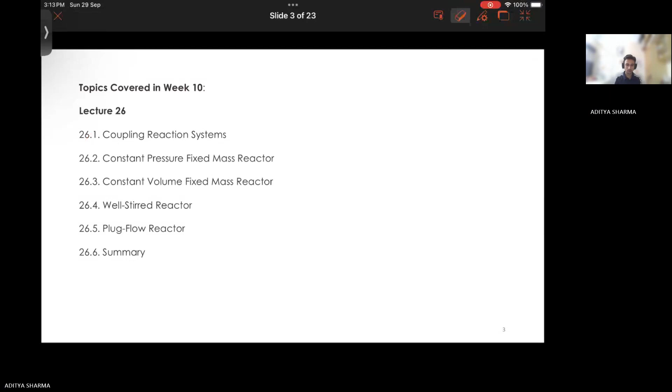So first topic is... so this is your coupling reaction systems. So what do we mean by coupling here?

As I have already told, we did discussion on chemical kinetics, right? And then when we are trying to understand a system, we try to do it using the basic conservation laws. The conservation of mass comes into picture, and then conservation of energy comes into picture. And if your velocity is also involved, momentum is also involved.

So now we have these conservation equations, and then we have our rate processes - the rates at which the different reactions or different steps are taking place. So what we do is we couple these two approaches: your conservation and your chemical kinetics. They go hand in hand, and this way we analyze our particular reaction. So this is the meaning of coupling here, coupling reaction systems.

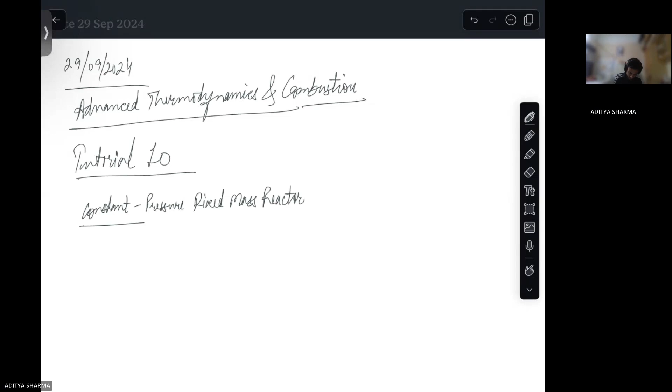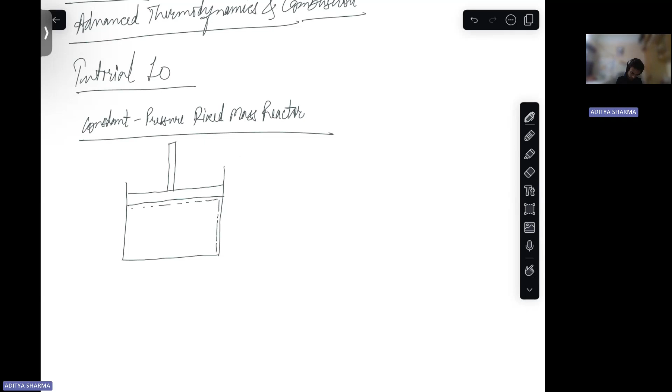So first is your constant pressure fixed mass reactor. One good example of a constant pressure fixed mass reactor is your piston cylinder, if the combustion is taking place in a piston cylinder. So this is the boundary of your system.

So this is your constant pressure fixed mass reactor. I'll draw these four reactors, and that will be helpful in discussing this. This is your second, then is your third, so this is your well stirred reactor. Then fourth is your plug flow reactor.

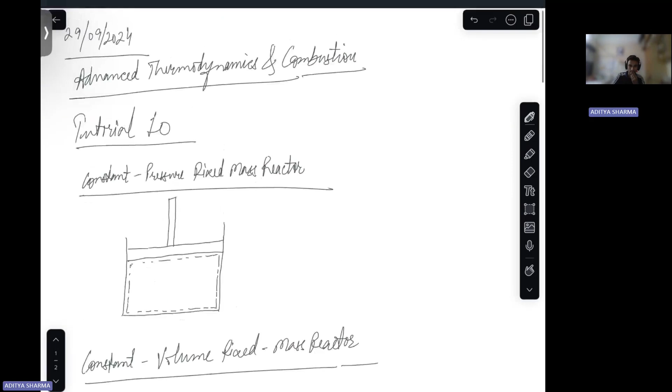So these four types of reactors have been discussed in this lecture. Let's see what the first reactor says. So this is a constant pressure fixed mass reactor - pressure here will remain constant, and the mass in your system which you are studying will remain constant.

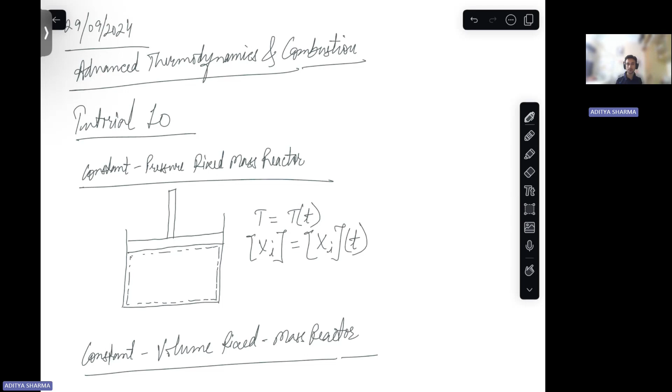So how do we analyze the system? We analyze the system by means of first, temperature data - with respect to time, how the temperature changes. Then we analyze it using the concentration data - the concentration of different species with respect to time. Then is your volume data - the change in your volume with respect to time.

Based on your conservation equations and your rate equations that we derived in chemical kinetics, we try to get the equations for these. This way we get information on how your temperature evolves in the reaction with time, how your species evolve in terms of their concentration, and also how your volume evolves. So this way we analyze such a system from the thermodynamics perspective, comprehensively.

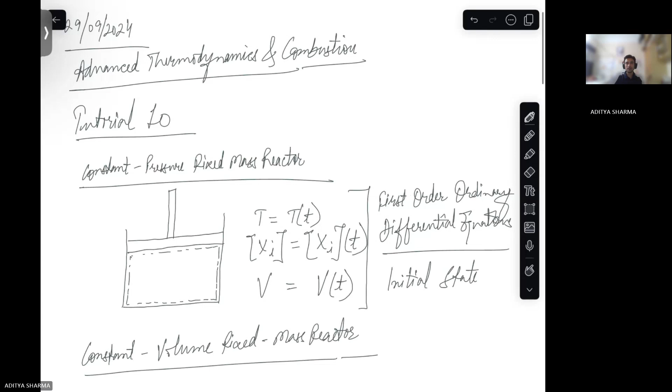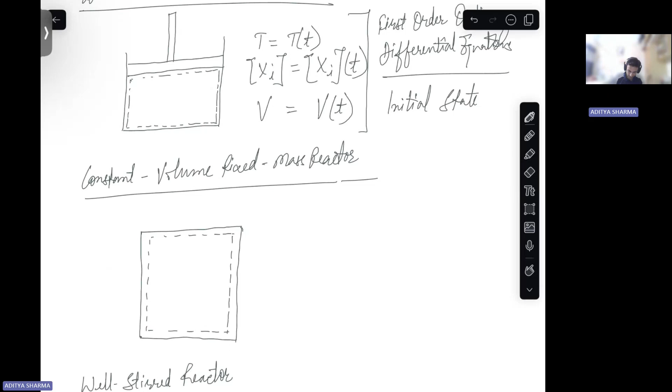Then is your constant volume fixed mass reactor. Here also some things are common if we compare it with the previous reactor. So we are concerned with the temperature that is changing with respect to time, then we are concerned with the concentration data of different species involved in the reaction that are changing with respect to time. But also here we are concerned with the pressure, because in such reactors there is change in pressure also.

So this way we try to analyze our such system in which combustion is taking place. So the pressure equation, then the concentration equation, and then the temperature equations all have been given in your lecture slides.

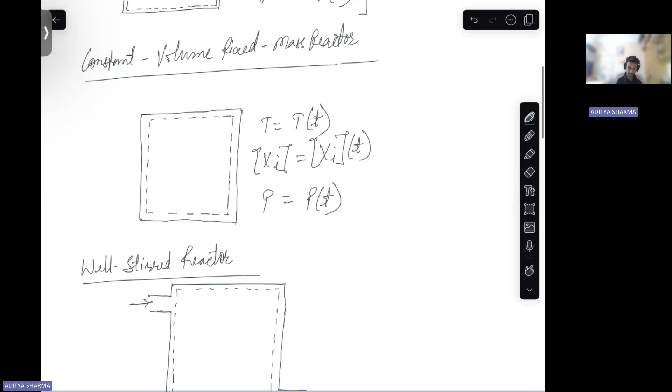Moving on to the next reactor type, that is the well stirred reactor. It's a type of reactor in which you have some flow into your control volume or the system that we are concerned with. So that system we define in terms of some control volume, like this is your control volume, where we have this is inlet and this is outlet.

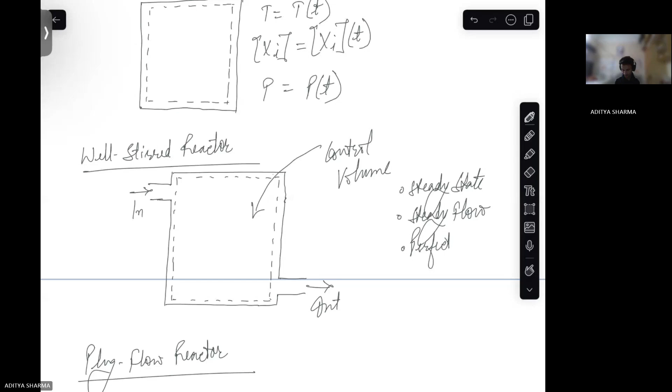First, we assume that the system will remain in steady state. Then we take the flow to be steady. Second, we also assume that the reactants are perfectly mixed, or the species involved are perfectly mixed. So this is your well stirred reactor.

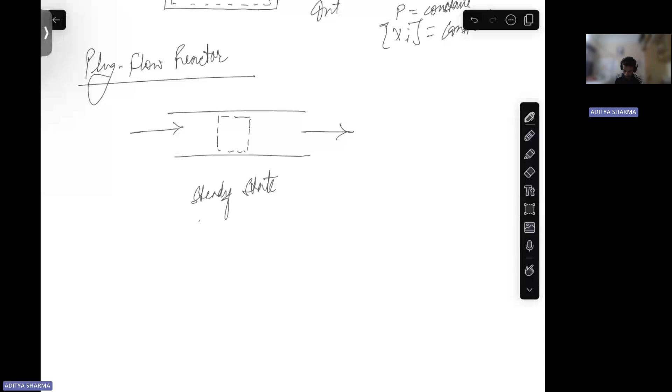Then there is no mixing in the axial direction. So no axial mixing takes place in these types of reactors. Also, we assume that the flow is frictionless in this case.

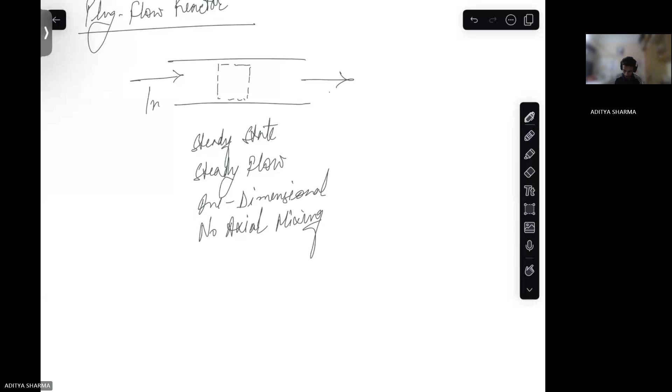So the process remains the same. We get a set of ordinary differential equations and the condition of initial state of the system, the initial values of the different parameters involved in a system when the system is in its initial state, and then we solve such combustion problem. So this is your plug flow reactor, this is your inlet and this is your outlet.

So these four types of reactors have been discussed in lecture 26. Then next is lecture number 27. So all these we have discussed, and now we will move on to lecture number 27.

So here the discussion is on the conservation, before and after, conservation of your different parameters or properties before and after the reaction. Not just before and after the reaction, but also when the reaction is taking place, these properties must remain conserved, right? So how these things come out in a chemical reaction during combustion — this is the focus of discussion in this lecture.

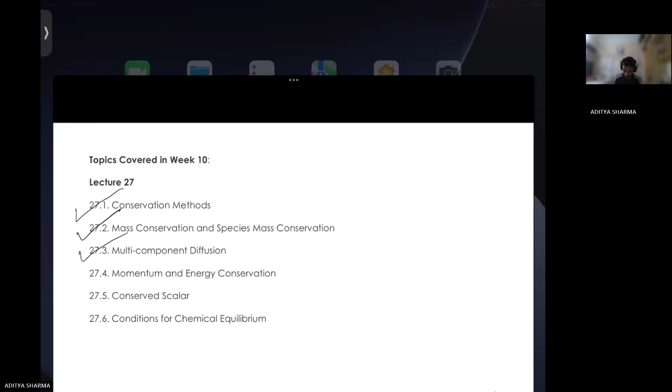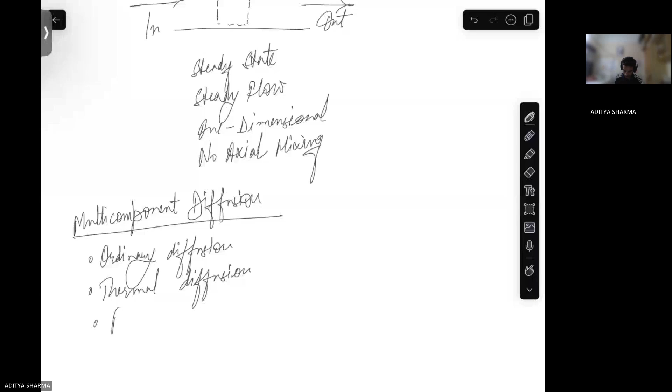One is your ordinary diffusion, then is your thermal diffusion, then is your pressure diffusion, then is your force diffusion. Ordinary diffusion is the one where the difference in the concentration of different species leads to diffusion - concentration gradient basically. Thermal diffusion comes from the difference in temperatures of different species. Same way, pressure diffusion comes from the pressure gradients, and forced diffusion is from the difference in the body forces of different species. So these are the four types of diffusion that have been discussed in this topic.

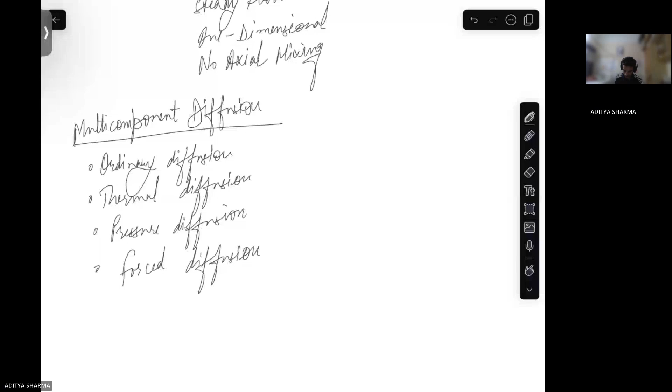So this is multi-component diffusion. All these factors we are taking into consideration here while doing our thermodynamic analysis of a reactive system. Same way, your momentum and energy conservation - how we do it - has been discussed here.

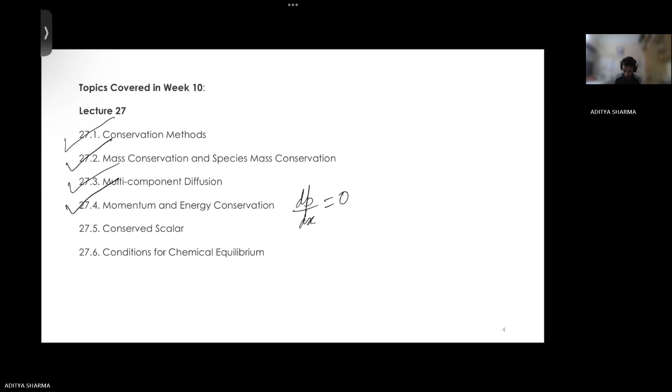After that is conserved scalar. Conserved scalar, as the name suggests, is a scalar property which is conserved for the whole flow field.

One such example of a conserved scalar is your mixture fraction. There are other properties also that can be conserved as scalar properties as far as combustion discussion is concerned, and these remain conserved. Mixture fraction basically is the mass of material originating in the fuel stream to the whole mass of the mixture. So this is the discussion on conserved scalar.

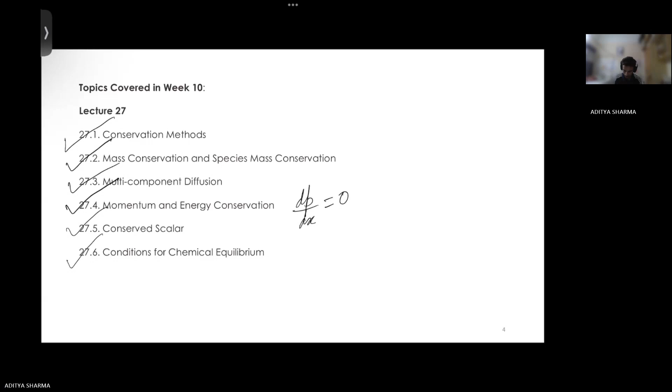So now we will move on to questions. First we will see conceptual questions, after that we will see numerical questions.

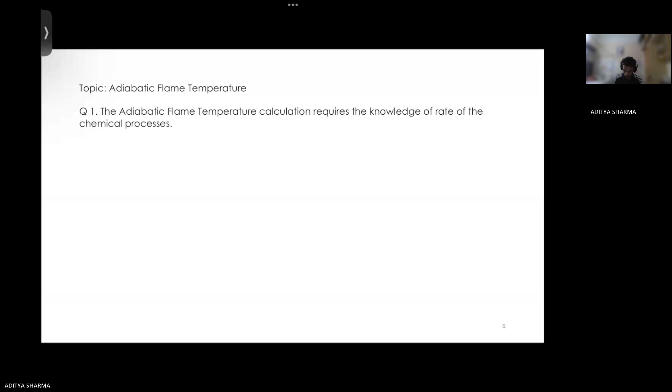First question is on your adiabatic flame temperature topic. Because though this topic has been introduced in week 8, the whole discussion is connected. Please read this question and try to answer this.

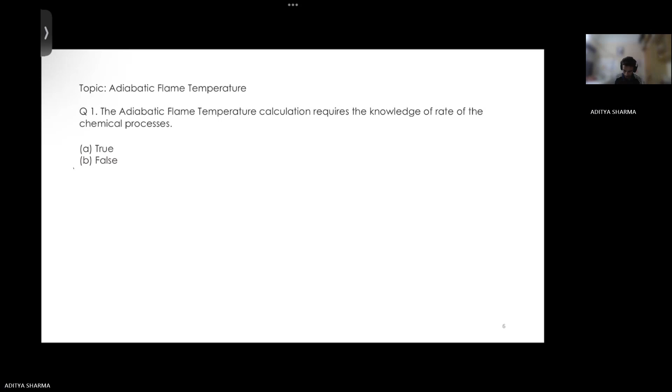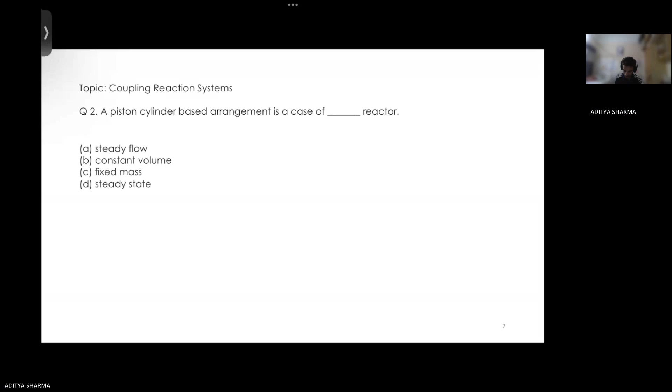So we have briefly seen the type of reactor that encompasses the piston cylinder. And that reactor is - so even if we see a piston, one thing we know is that there is no steady flow here.

So this is not your answer. Then if you see constant volume, that is also not true because the piston will move. In that case, volume will change. Next is your fixed mass and then steady state.

In such type of reactors, your temperature with respect to time and your concentration of species involved with respect to time will change. So in that case, it cannot be a steady state reactor. But the mass inside this reactor remains fixed, correct?

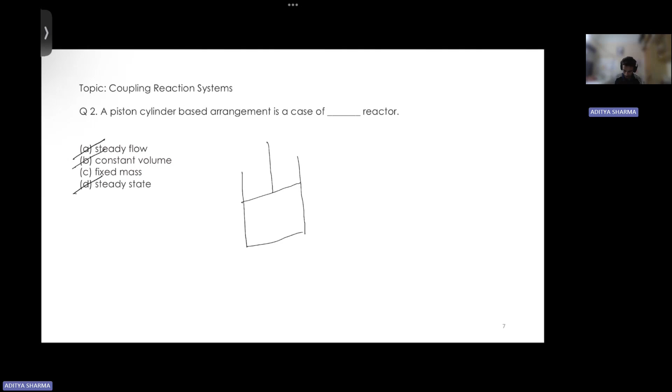So in that case, option C is correct. So you see the answer is option C.

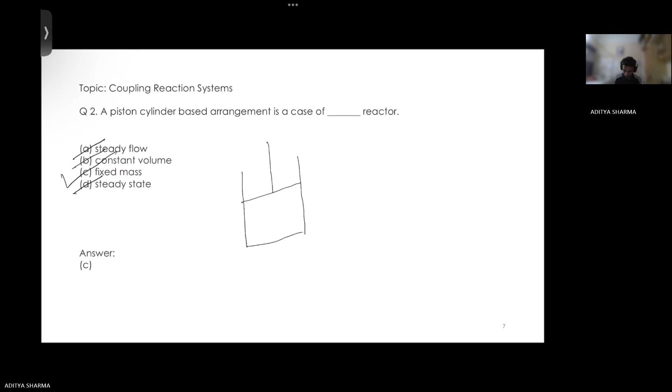Then moving on to the next question. The question is on mass conservation and species mass conservation.

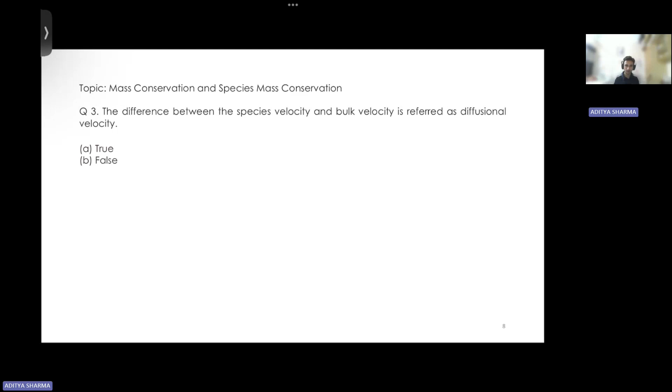So this is a correct statement. This is your species velocity, okay, and then this is your bulk velocity. And then this is your diffusional velocity. This diffusional velocity is used in the species mass conservation equation. So this is a true statement.

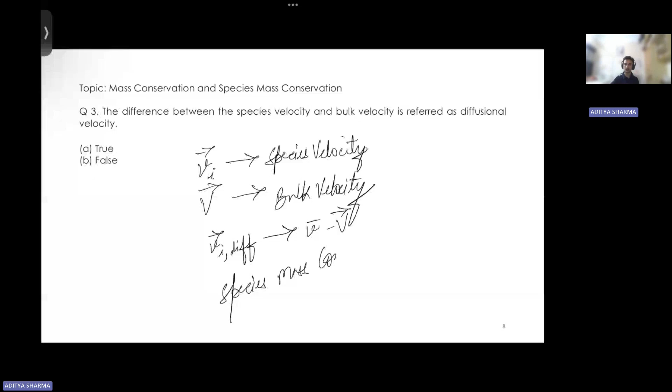Okay, so moving on to the next question. So when we define our species mass conservation equation, we also define the diffusional velocity.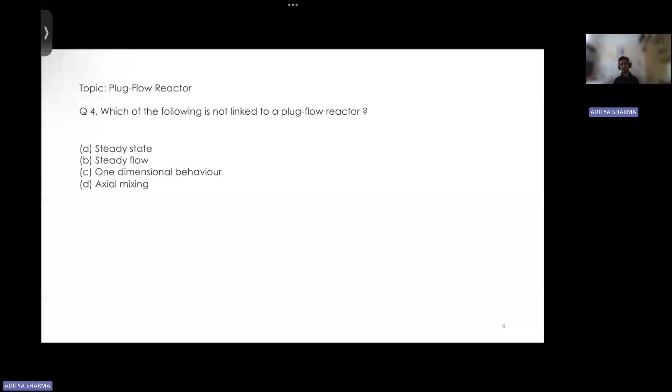So there are types of reactors. In some reactors there will be axial flow mixing. In this one there is no axial flow mixing. Then we saw constant pressure and constant volume reactors - their perfect mixing takes place.

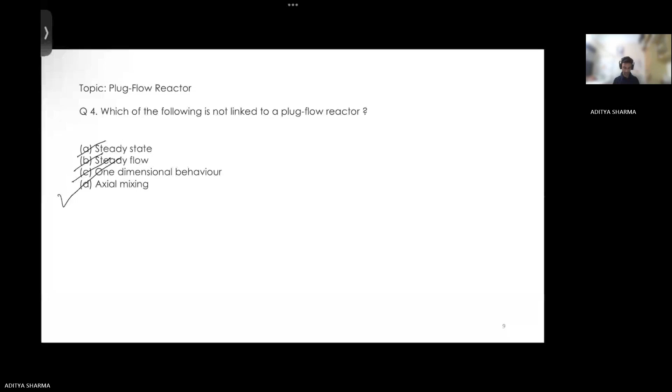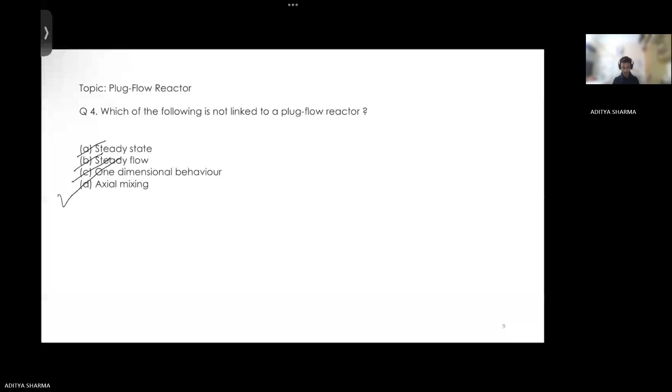So this is the answer to your question number 4, option D. So let's see the next question then - question number 5.

The question is on multi-component diffusion. Please read the question and try to answer this. The question is based on the knowledge of thermal diffusion. So what happens in thermal diffusion?

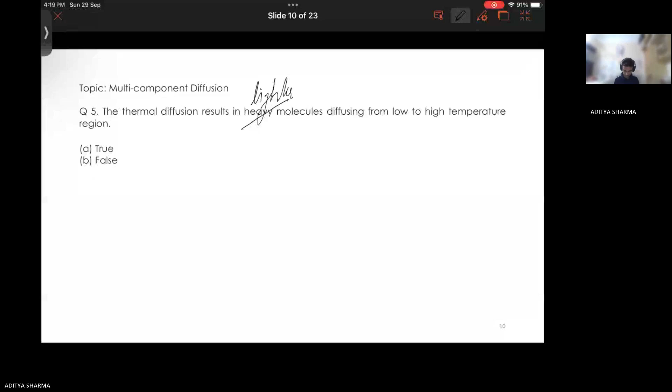This is an incorrect statement because it is the lighter molecules that move from low temperature region to high temperature region. And for heavy molecules, diffusion takes place from high temperature region to low temperature region. But this statement is written wrongly, so this is a false statement.

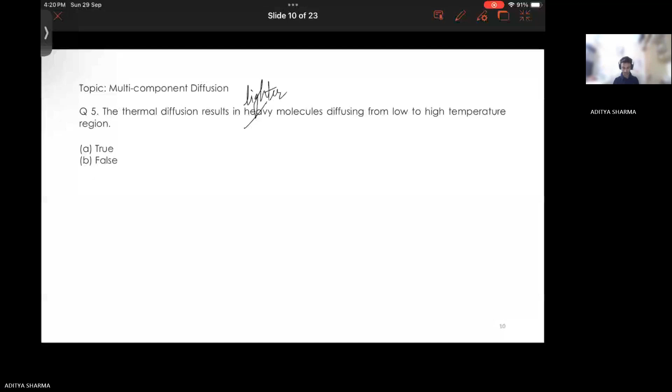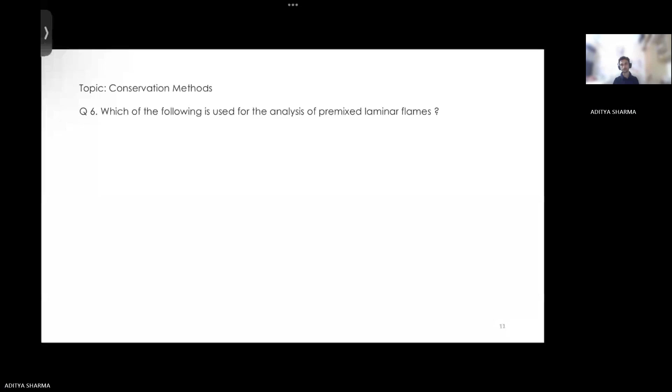Now moving on to next question. The question asks about premixed laminar flames. So to analyze these types of flames, the governing equations that are considered, keeping in mind what type of geometry. This is the question, so please see this question.

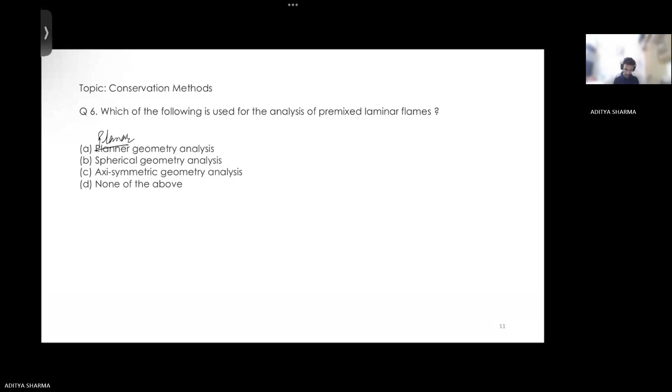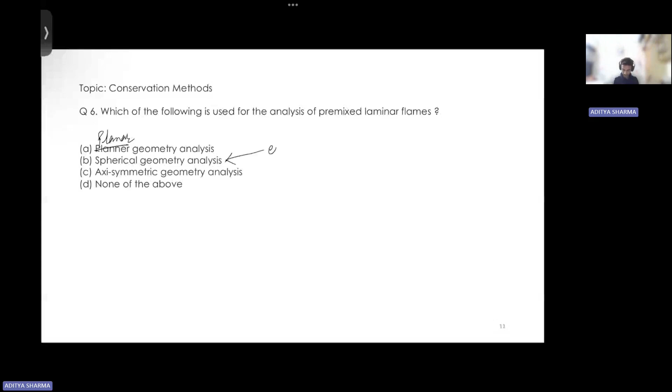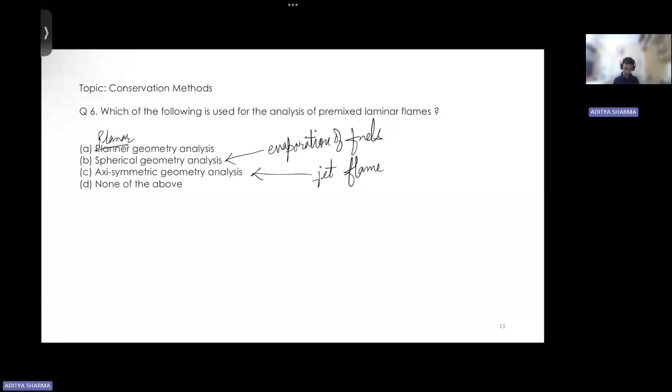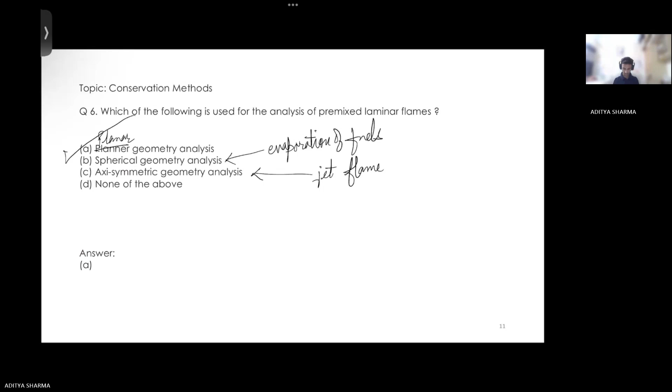Out of these, your spherical geometry is used for evaporation of fuels. Your axisymmetric is used in your jet flames analysis. And this planar geometry analysis is used for premixed flames. This basically is one-dimensional planar geometry analysis. So option A is the correct option for your premixed laminar flames. Your one-dimensional planar geometry analysis is used. Answer is correct. So let's see the next question.

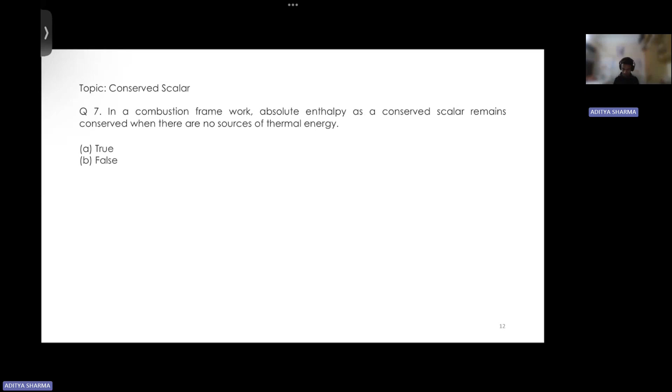So this question says that in a combustion framework, the absolute enthalpy as a conserved scalar remains conserved when there are no sources of thermal energy. So here, absolute enthalpy has been termed as a conserved scalar, and then it states a condition for that, that it takes place in this condition. So whether absolute enthalpy is a conserved scalar, and also whether the condition given for the absolute enthalpy to be conserved is correct, we need to answer this. So please try to answer.

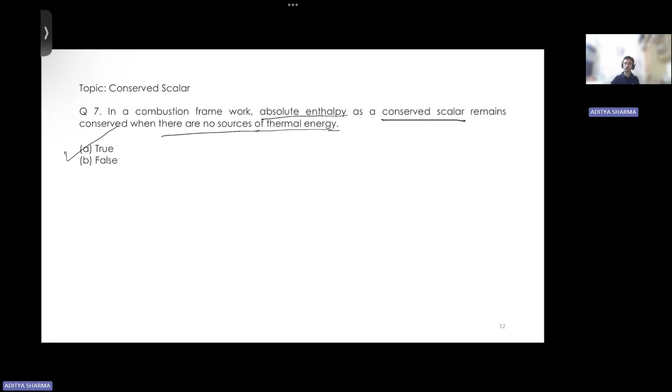So this is a correct statement. Absolute enthalpy is considered a scalar in your combustion analysis of a particular system. It remains conserved if there is no source of thermal energy in your system. So this is a correct statement. Then moving on to next question. So option A is correct.

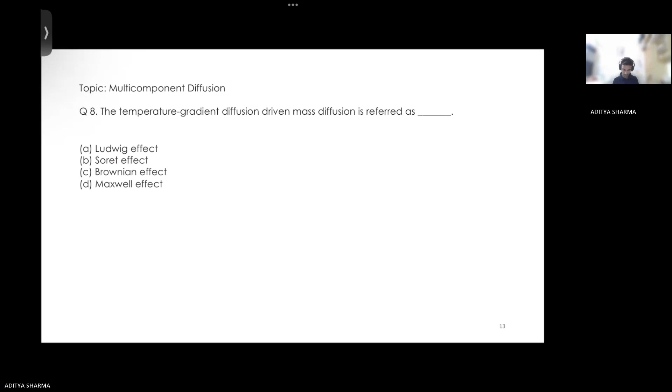So question number 8 says that the temperature gradient diffusion driven mass diffusion is referred as. So temperature gradient driven mass diffusion is referred as dash. So four options are given. So what will be the correct answer to this question?

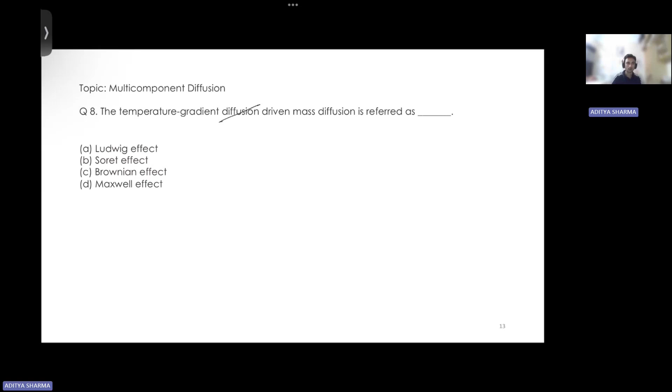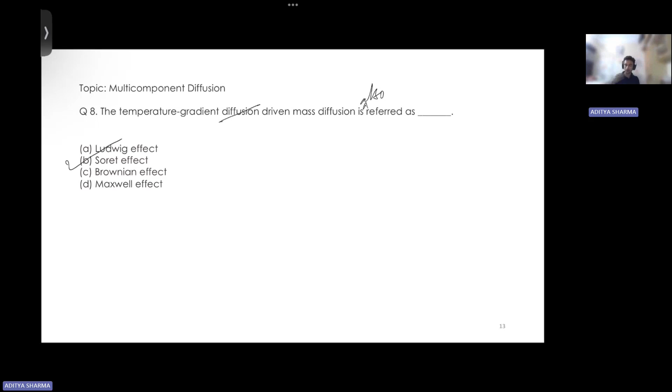Is also referred as this. First option is Ludwig effect. Second option is Soret effect. Third is your Brownian effect, and fourth is your Maxwell effect. So this is a fact-based question. And the answer to this question is option number B. So Soret effect or thermal diffusion, these are one and the same thing.

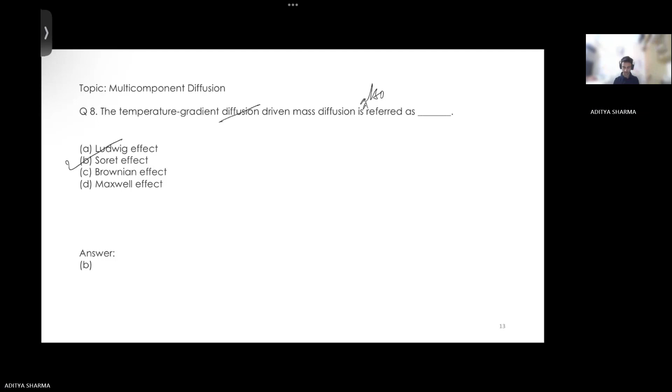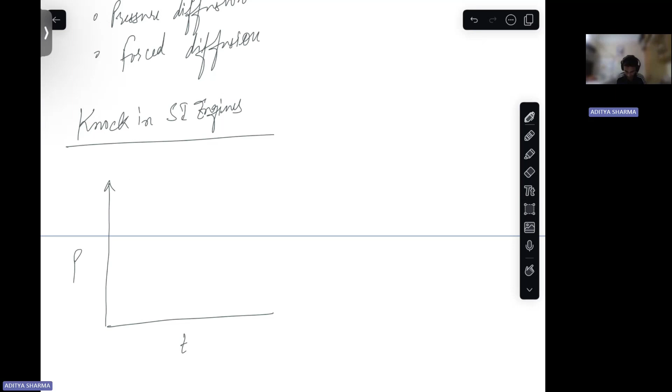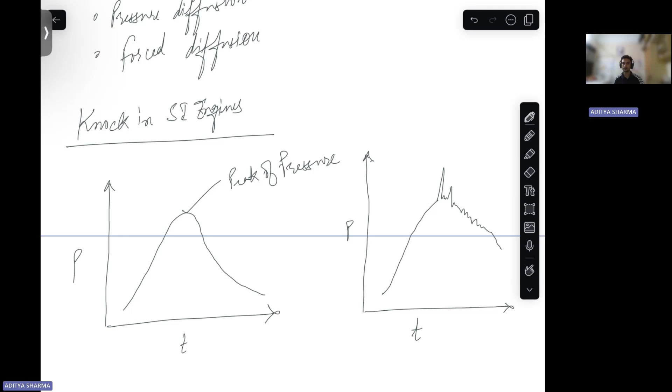So what happens in knocking? Knocking in SI engines. So you'll understand it by means of a graph. So this is your pressure versus time graph. Ideally, your combustion takes place like this, where this point is the peak of pressure that is derived from the combustion. But in case of knocking, what happens is some instability in combustion is seen, and this type of behavior in combustion can be of danger to the vessel in which combustion is taking place.

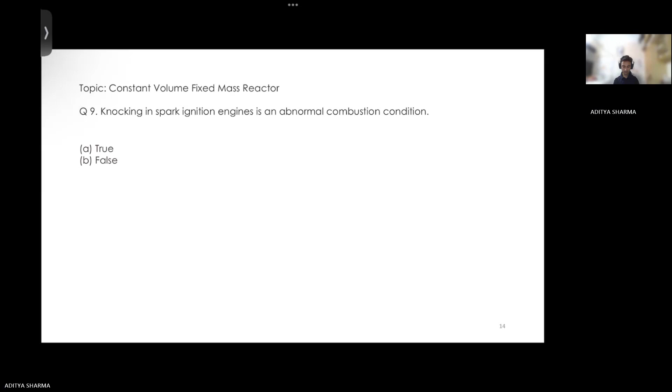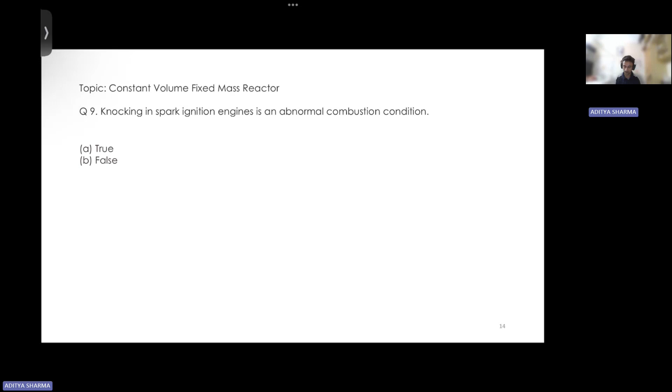So this must not take place during combustion, correct? And when the statement says that knocking in spark ignition engines is an abnormal combustion condition, this is a correct statement. So moving on to the next question.

Multicomponent diffusion. Which of the following are the dominant modes of diffusion flux in a typical combustion system? Please try to answer this. Which of the given options, which two are the dominant in a typical combustion system?

Okay, so out of these, option B is the correct option.

Ordinary and thermal diffusion. Ordinary diffusion is based on concentration gradients, and thermal diffusion, which we have discussed a lot, is based on thermal gradients. So B is your correct answer to this question.

Generally, in combustion systems, diffusion is seen based on these two, and forced diffusion and pressure diffusion are less significant. Forced diffusion is based on body forces, the difference in body force, or body force gradients. Gravitational force is a type of body force.

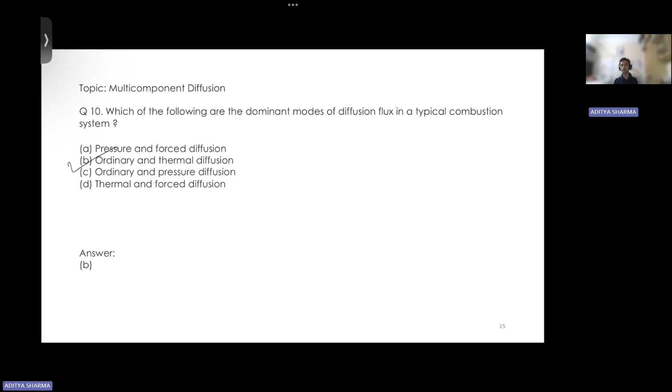So then, moving on to next question. Conditions for chemical equilibrium. For chemical equilibrium to take place, what should happen to the Helmholtz function or the Gibbs function?

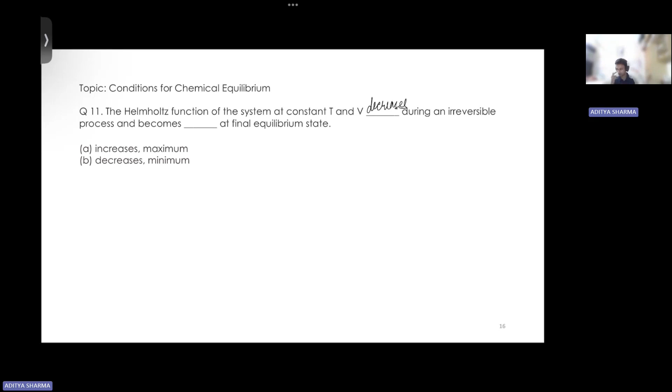At constant temperature and volume, for a reaction to be in chemical equilibrium, the Helmholtz function decreases and becomes minimum. In that case, option B is your correct option.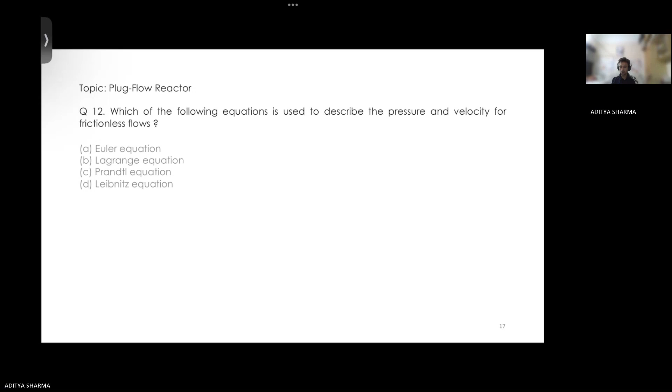For frictionless flows, the equation we use to describe the pressure and velocity is the momentum equation, that is the Euler equation. In a plug flow reactor we assume there is no friction involved in the flow, which is why it has branched from this topic. So option A is correct in that case.

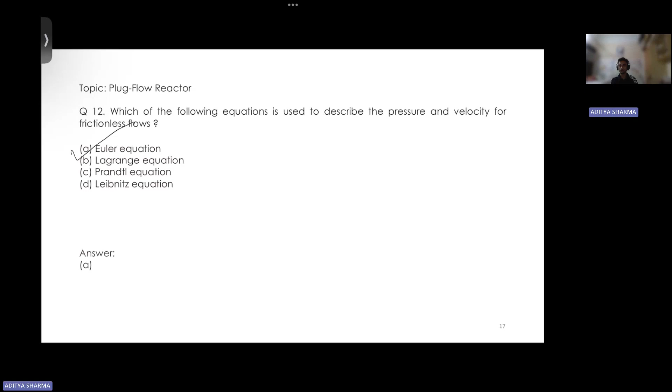Then now the last section of the session, numerical questions. This is the information given for question number 13 to 15. It is a multi-component system of hydrogen, nitrogen and oxygen.

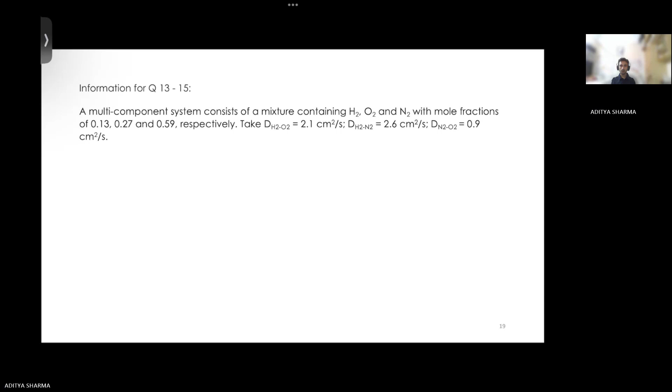Binary diffusivity for pairs have been given, three pairs have been given of the components. Then we need to find out first for species H2, the binary diffusion coefficient.

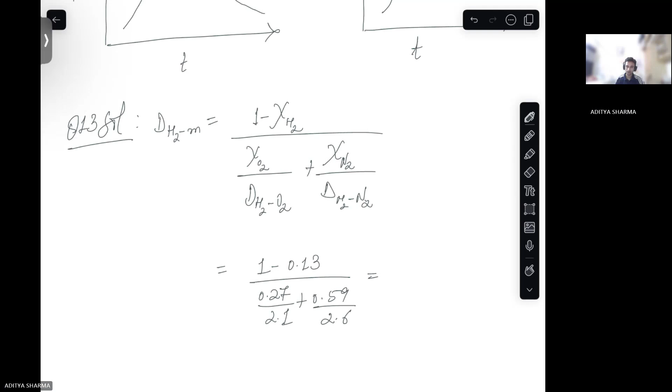The formula for that is simple: 1 minus mole fraction of H2. From the given question, this is 0.13, 0.27 divided by 2.1, plus 0.59 divided by 2.6. So this will come out to be 2.447.

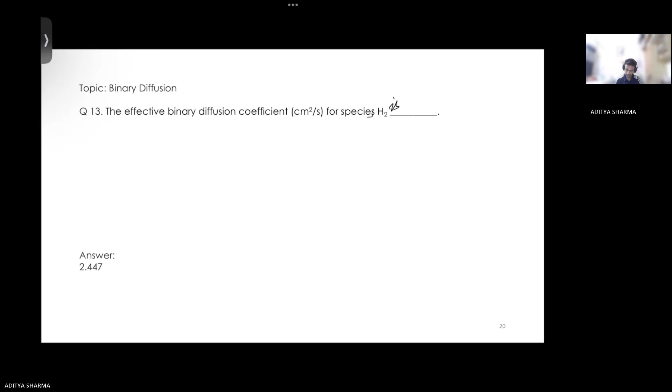Same way, question number 14, for oxygen we need to find it. Okay, by mistake I gave the answer, but that is fine, we will calculate it.

So this comes out to be 1.017. The last question, 1.017 here also is.

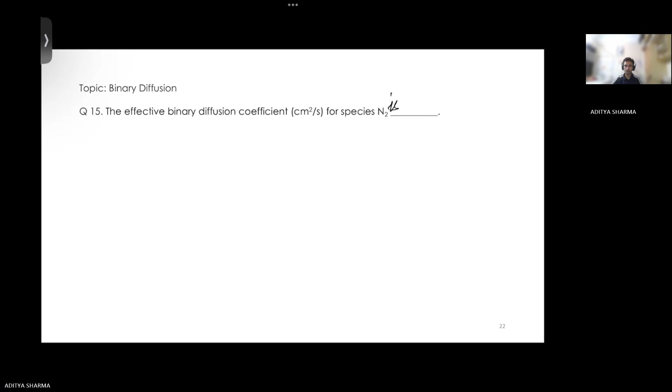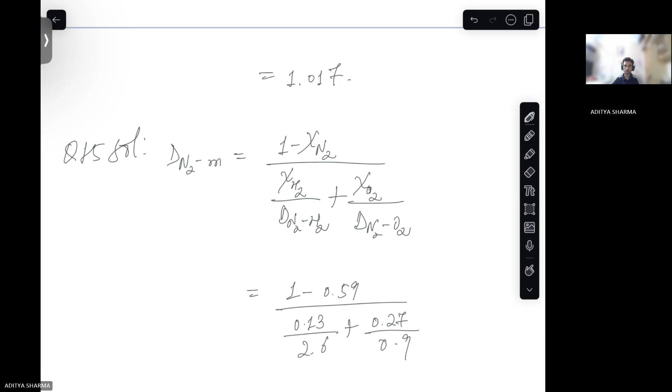So let's solve for it. This is your dn2m. If we calculate this, it comes out to be 1.171 centimeter square per second.

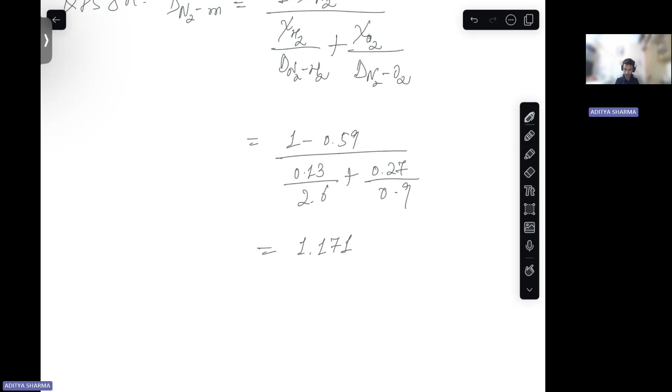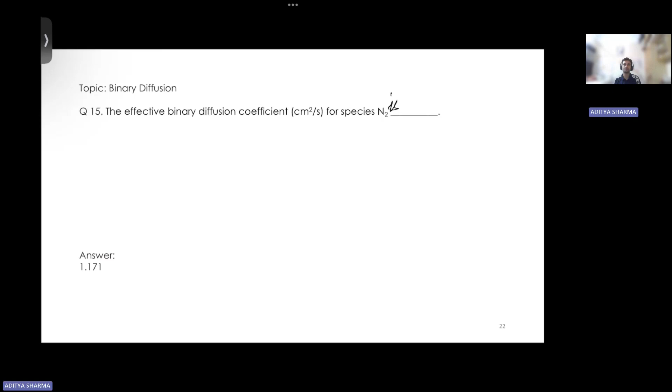So this was your last question, and this way we have come to the end of this session. This was your session number 10 on thermodynamics of reactive systems, where there were two lectures.

The first lecture was on reactors, where we discussed constant pressure fixed mass reactor, then constant volume fixed mass reactor, then well stirred reactor, then plug flow reactor. So these were the four reactors.

After this discussion on four reactors, we moved on to lecture 27, where there was discussion on conservation of different properties as far as a combustion system is concerned. There we saw conservation based on mass, then species conservation.